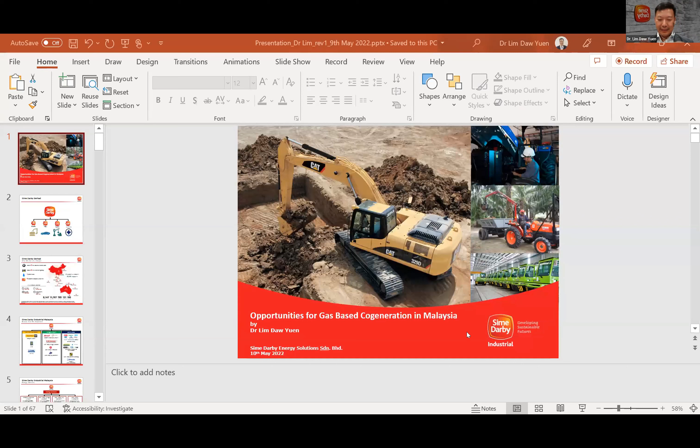Again, I want to extend my appreciation to COGEN Europe and CWC for inviting me to share some thoughts on COGEN updates and opportunities, and some challenges in Malaysia. Malaysia has a small population, about 33 million. I believe COGEN has just started progress in this country.

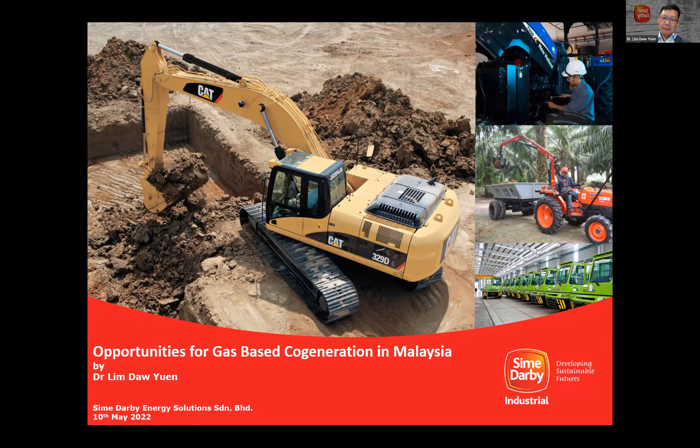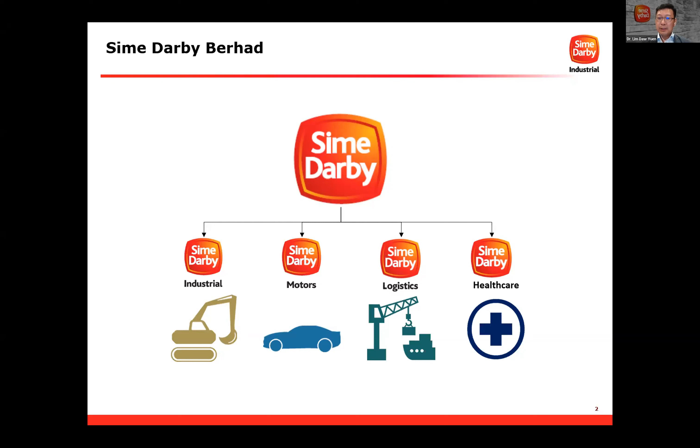Let me explain a bit about my company. It's publicly listed in Malaysia. We have close to $10 billion in revenue, with an employee headcount of 20,000 staff. It's a country-owned, government-linked company in Malaysia, and we specialize in various businesses. One area we're involved in is Caterpillar, which is our major brand. My business involves energy services.

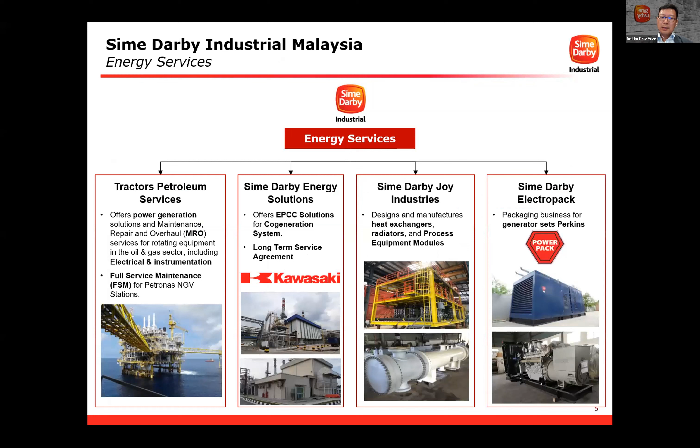It's part of oil and gas, and COGEN is part of Sime Darby Energy Solutions. We partner with our business partner in Japan, Kawasaki. They are a very helpful, reliable, and quality brand. Of course, we also carry other brands under Enlit Group. I will skip some of these slides.

Our company started in 1993. It's not really a big company, just close to $20 million today in revenue. We have close to 49 projects involving oil and gas, and more or less 50% of those involve COGEN, CHP projects in Malaysia. In Malaysia, we had certain obstacles and challenges from 2006 to 2012 because of a shortage of natural gas. Since 2012-2013, we managed to revive the CHP projects in Malaysia, and today we have almost close to 5 projects per year.

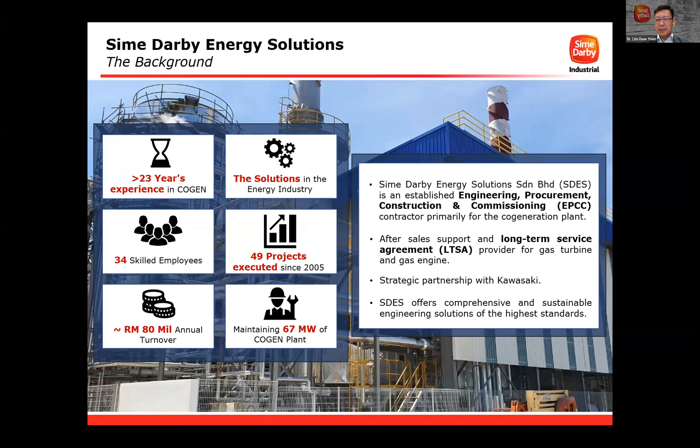Today, what I want to share is that in Malaysia, we are looking very much into high prices of utility costs, mainly involving natural gas, because most industrial customers or users use natural gas to produce heat. Based on Malaysia's power generation mix, close to 40% is from natural gas, and some from coal, with some ongoing.

A large portion comes from renewables as well. I see a lot of increasing demand and concern when it comes to greenhouse gases, like our panelist mentioned just now. Malaysia is heading toward a potential carbon tax, I believe, within the next two years. Our government is also heading into a certain act under the Energy Efficiency and Conservation Act, to protect and ensure the wise utilization of energy for all industrial users.

But the challenge we face today in Malaysia is also quite high prices on top-up charges and standby charges, and that is something we want to bring to government, hopefully with incentives and efforts to overcome all these obstacles.

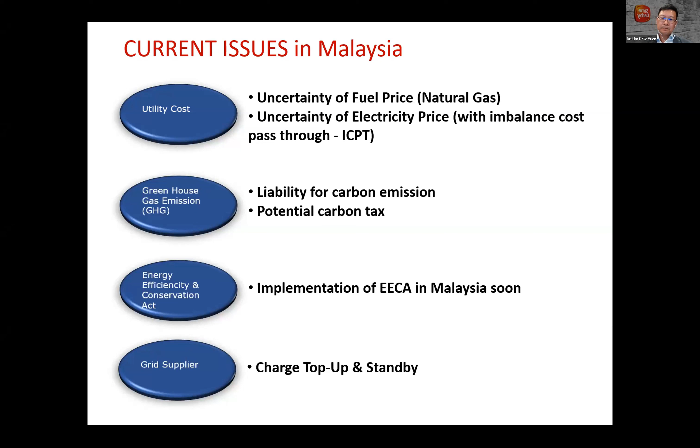In Malaysia, we mainly have applications using pipeline natural gas as the main source to produce power, and our heat is mainly used for process steam, and some for hot water processes. Some properties like district cooling and data centers have ongoing demand on data centers. We are more into chill water supply and application.

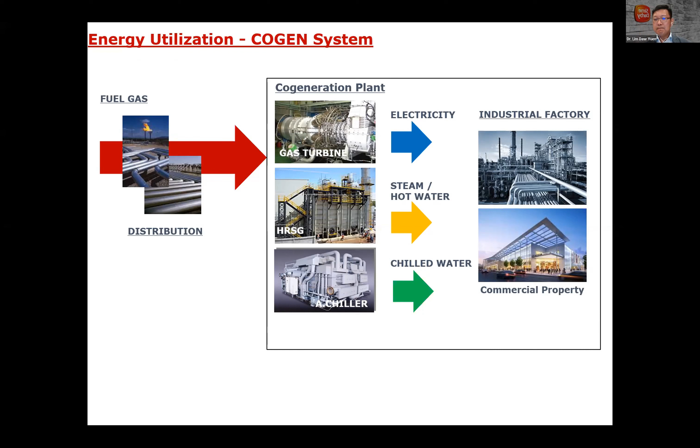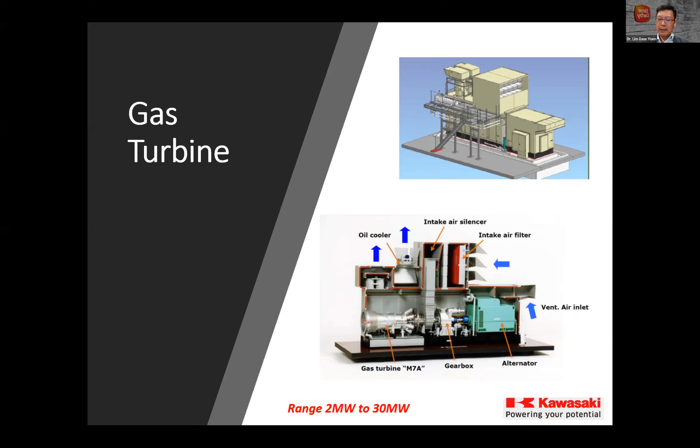In Malaysia, we are more focused on industrial scale gas turbines. There are two markets here: one is the supply market, where we create the industrial zone, and Cogen and CHP is part of that, with large scale gas turbines. But the ongoing popular demand is more for small scale industrial demand. We are looking at sizes from a minimum of 2 to 3 megawatts up to as far as 30 megawatts, with various sizes of gas turbine. Sime Darby is working with Kawasaki from Japan, and we thank them for that opportunity.

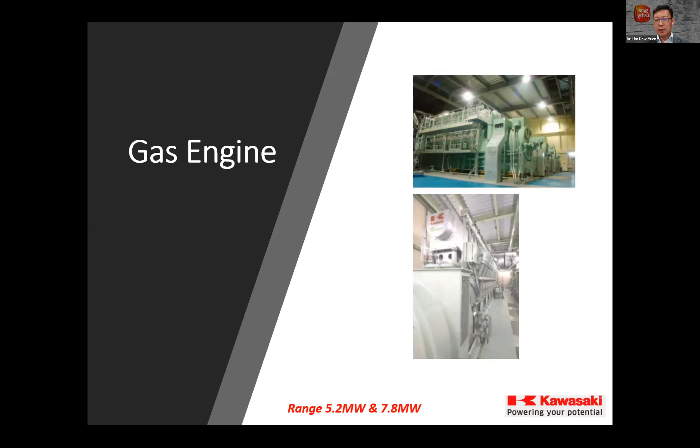Not only gas turbine, but some of the projects also involve gas engine. We also use Kawasaki. Some of the applications that I've analyzed with my team over the years, we are looking at close to 400 megawatts of opportunity.

Mainly our customer base today is more on oleochemicals, where most of their products also supply across the world, especially in Japan and Europe. We also have ongoing paper supply across the world, and chemical, oil refinery and rubber glove industries as well. So that's something we're looking at.

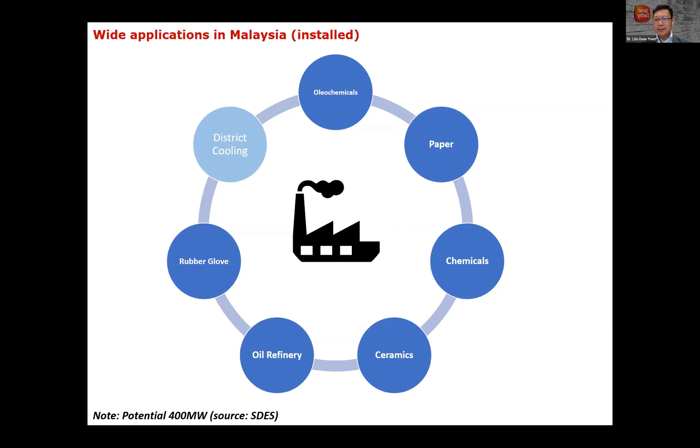In Malaysia, we're also looking at emerging markets such as district cooling for data centers, and that's something we want to venture into as a new market. So on and on, we think within 5 to 10 years time, we should see a potential market of 400 to 500 megawatts, which can be considered small to some of you.

Now, some of the experiences I've faced in Malaysia: we face a lot of obstacles when it comes to integration and tie-in with the grid supplier. We also have a lot of obstacles when it comes to space, because some of the industrial customers or users already use up all the space. So some of our projects are using a double story design, where the gas turbine is installed at the lower ground, and the HRSG, heat recovery steam generator, is located at the second floor.

We also face curtailment for natural gas. Today, Petronas, which is our main oil and gas company, the national oil company in Malaysia, has managed to overcome this shortage. And I believe the natural gas supply over the years should not be an issue.

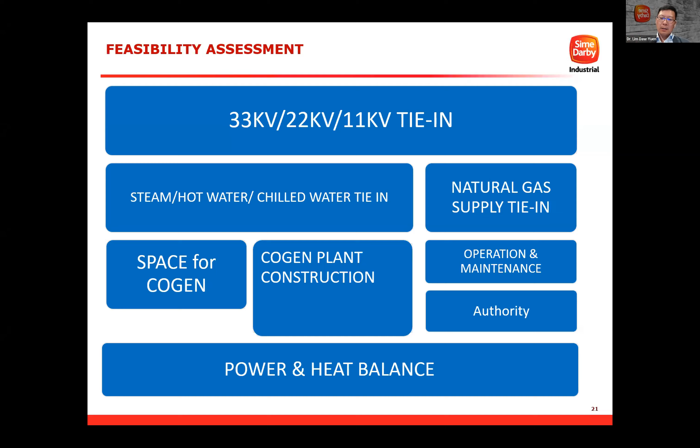Now, when it comes to Malaysia, most of our projects are using synchronization with the grid supplier. In this case, it's Tenaga Nasional, TNB, the grid supplier in Malaysia. The reason is because we want to ensure full redundancy in the event of a shortage or trip from the Cogen or CHP plant, or a shortage of natural gas. To the industrial users, the more important thing is their production, because the losses in revenue is something they need to consider.

Based on our heat recovery, this example is 6.5 megawatts, which is getting more popular in Malaysia. We are able to extract close to saturated steam of 16 to 17 bar gauge, close to 16 tons. Normally we recover it to fully maximize it. Some of the plants are maximized at 35 or 36 tons per hour, some even go up to 42 to 45 tons per hour.

By using a duct burner, which is a supplementary system that can further boost up the temperature and so on. One thing to highlight: Malaysia's temperature, in the Asian tropical climate, we're looking at somewhere around 32 to 35 degrees Celsius as an average temperature, and normally we look at the net output at that temperature range.

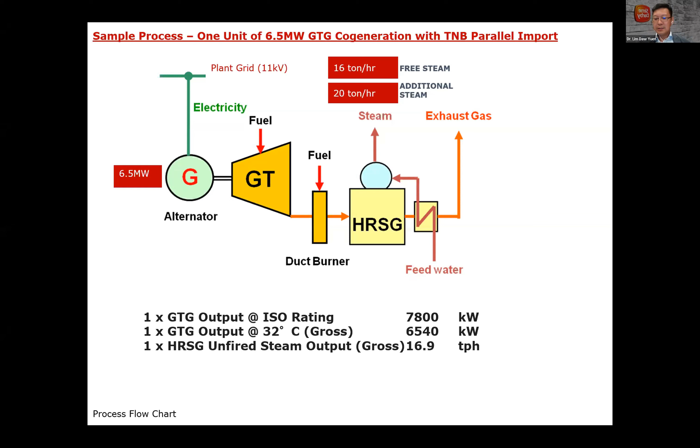Now I will give some examples of our setups. Our major customers involve oleochemicals, where they process crude palm oils as intermediaries to produce useful downstream products. As of today, we are close to, I would say, somewhere around 30 to 40 megawatts extracted from these oleochemical industries.

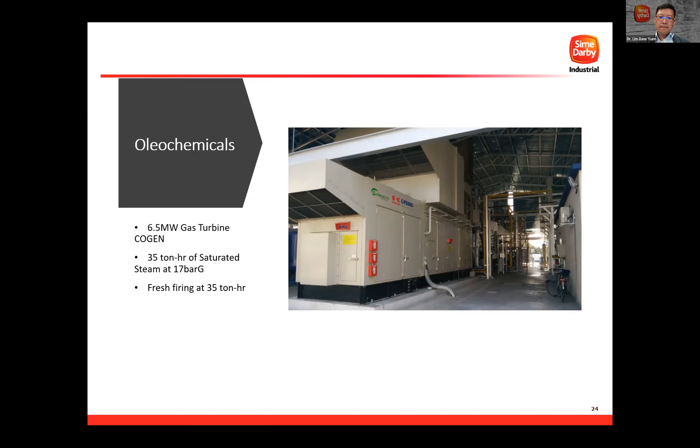Some of the examples we have put in are quite straightforward in design and implementation. We don't fancy our design, it's straight to the point, where it's a single floor with a turbine coupled with an HRSG to produce the necessary steam and power, and the balance of plant is more into a control and electrical room.

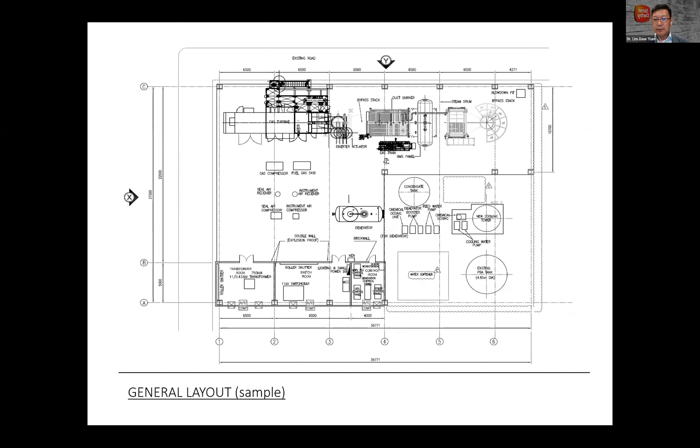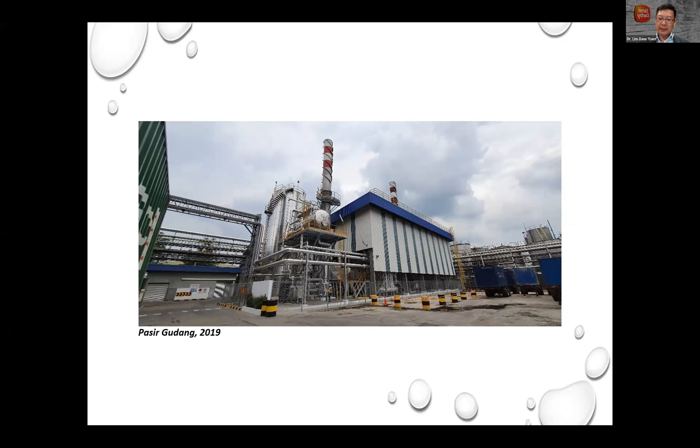Like this example, we also have a water treatment using reverse osmosis. Our design is more of a simple shed type, warehousing kind of design. We don't over-design it, because in the Malaysia context, believe me, every single cent counts when it comes to investors. So they will look into a straightforward kind of design. This is some of the examples we have installed in Malaysia.

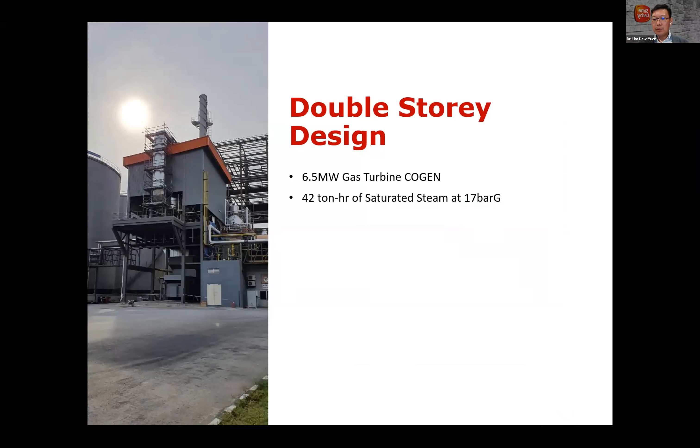One good example is a double storey design. That is something where the space is constrained, and we managed to overcome this obstacle by having a double story design where our turbine is located at the ground floor and the HRSG is located at the second floor, with the combined stacks as exhaust output.

All our processes also have a diverter damper. In some of our projects, we also allow our HRSG to function as a standalone boiler. In the event of tripping on the gas turbine, the HRSG can be standalone by using a fresh air firing system. Not this double story, but the previous few examples use a fresh air firing design.

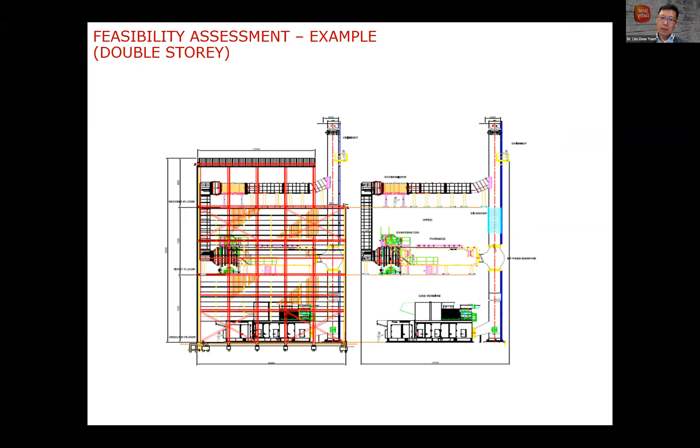Now, some of the examples also use gas engines. It's 2 units using 5.2 megawatts. Thanks to Kawasaki's assistance, we managed to set up the plant, and today it's running very well. This is trigeneration. We managed to generate steam because gas engine heat output is lesser compared to gas turbine.

Steam is one. We also managed to generate chilled water using an absorption chiller, also from Kawasaki, and we managed to generate hot water as well. The efficiency for gas engine Cogen CHP, we managed to get about 72%, whereas the CHP for gas turbine Cogen is above 85% on average.

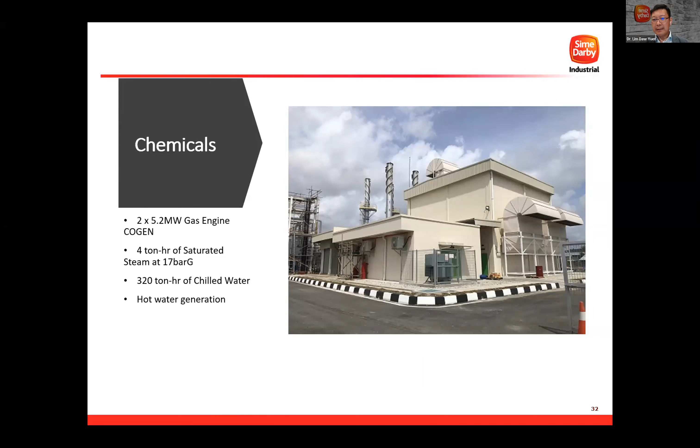Right, so a bit of economics. We're looking at today's gas price, which is close to $10. Last year it was somewhere around $8 per MMBTU. Based on our analysis, looking at the high gas price today, anything above 5 megawatts is very doable.

But when it comes to gas, it's already a liberal market in Malaysia. We have third-party access to bring in and out the gases. Based on that, we believe it's still a very attractive market, especially for those sizes above 5 megawatts, for the industrial size.

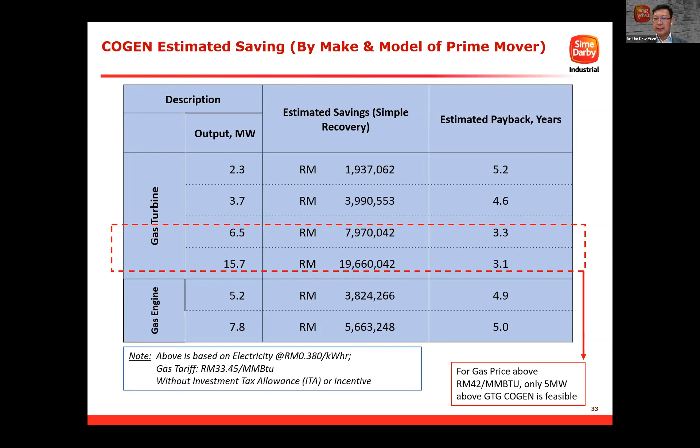Now, one thing to highlight is the gas district cooling that we installed from 2003 to 2005, based on our government centralized region. This island itself is located 30 kilometers from Kuala Lumpur International Airport. We also managed to set up this commercial-based design gas district cooling. It's 2 units of gas turbine cogeneration inside.

I believe in Malaysia we are going to see a lot of opportunity in terms of data centers. We hope that this Cogen and CHP can apply to this application as well.

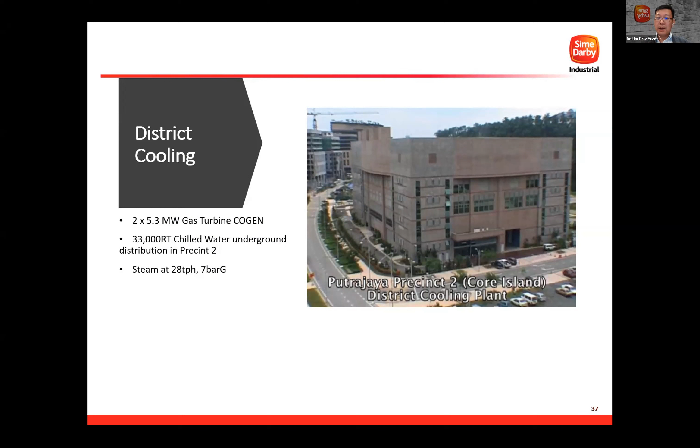Now, one thing we have to highlight is that I saw a lot of examples from hydrogen and biomethane. That's something Malaysia has in abundance - biomethane or biogas from palm oil waste. Just for the record, we have close to 440 palm oil mills. Out of 440 palm oil mills, probably about 30% is utilized for PPA projects.

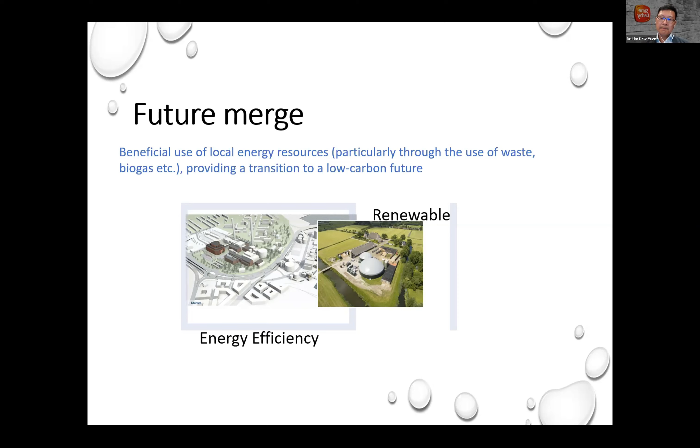We have a balance of 60 to 70% that may be useful to merge the RE side with the EE as a feeding of gas to our cogen systems. That's something as part of our Malaysia associations. So I basically also spearhead the Malaysia Gas Association for CHP promotion in Malaysia. We're also looking into implementation of biomethane and hydrogen into CHP projects.

But one thing to share is that hydrogen is not really feasible today in the Malaysia context. Of course, it's still ongoing development. We see more opportunity because of biomethane or biogases.

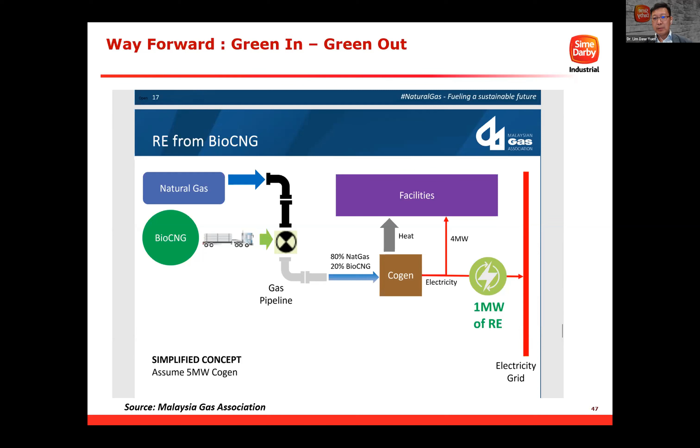And with that, I also want to share some opportunities. In Malaysia, our stock exchange, which we call Bursa Malaysia, is really into formalizing and legalizing this stock exchange for carbon credits, and you can see the development across Malaysia. Somewhere around end of this December 2022 or early 2023, we hope this program can be up so that more CHP opportunity, especially the biogas or biomethane conversion with CHP, can be applied.

Now, last but not least, Malaysia is fully encouraging a lot of foreign investors to come in and do a lot more investment, and they're giving a lot of grants and tax exemptions, especially this incentive from MIDA. MIDA is the Malaysia government investment development authority.